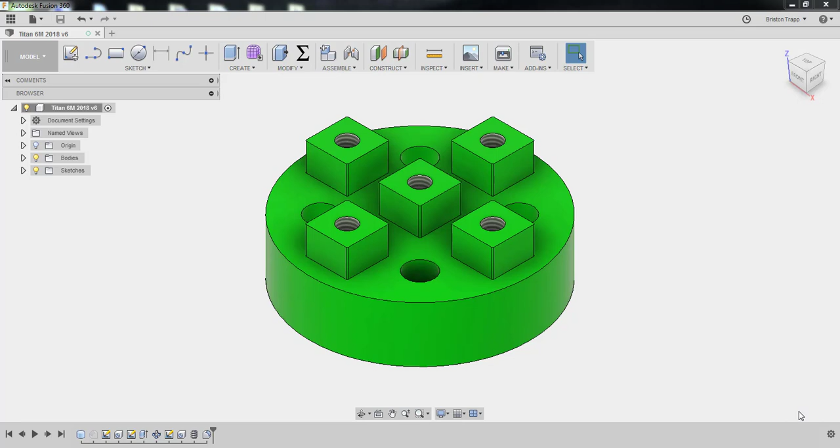Welcome to Titan Building Block 6M PCSC Machine Fab Edition. So, in your setup, it's going to be very similar to 5M. Our work coordinate system is going to be top, front, left corner of our stock.

Our stock's going to be fixed size box, X width 2.05. That is basically the minimum amount that we need to make this part. Any larger is going to be a little bit wasteful. 2.1 is probably a little more obtainable on the saw, but do your best to get 2.05, definitely no less than 2 inches, because that doesn't leave enough room to do any machining. Y depth is going to be 2, Z depth is 1, because we're using the same size stock.

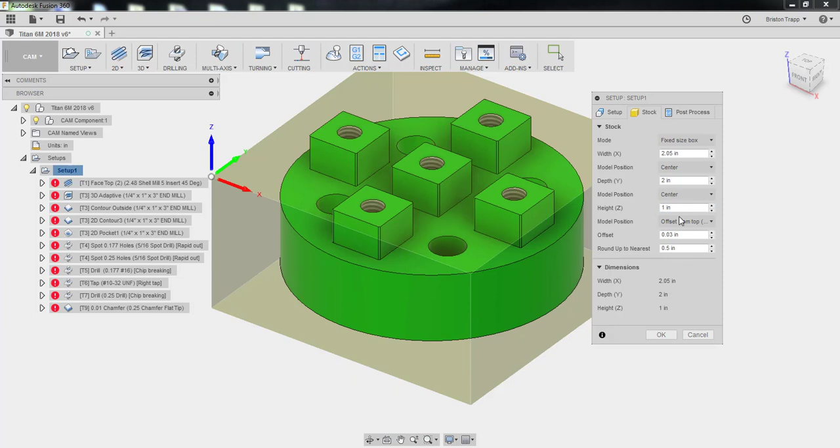And very important to make sure that you have it offset from top 30 thousandths, because we just want to take a little skim pass, and I'm only talking to the couple students that have buried the shell mill into the top of this part because they don't leave it offset, it's centered. We do not want this. We do not want our model centered in our stock in the Z direction because that is way too much of a cut. So, make sure it's offset from top, and 30 thousandths is just enough to take off, clean up the top surface of our part.

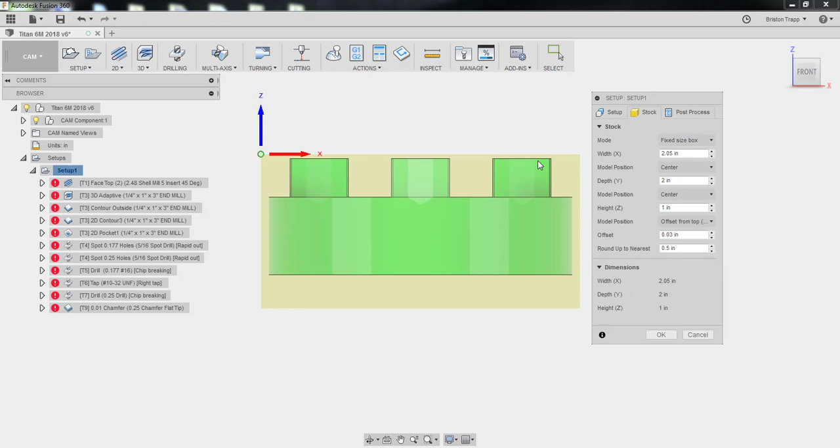Our stock size verify is going to be 2.05 by 2 by 1. Post-process is going to be preferably 6001. Program comment 6M S1 with your initials. Make sure you're still updating this comment section, because if you're just copying everything over, you might forget about this, and then what else are you possibly forgetting? And we're going to use our work offset number 1, G54, and this is basically the exact same work offset as Titan 5M, so we don't have to do any additional probing whatsoever.

So, in review, work coordinate system, top, front, left corner, stock size, pretty much the standard. Make sure it's offset from the top, especially if your initials are ZP. And that's it.

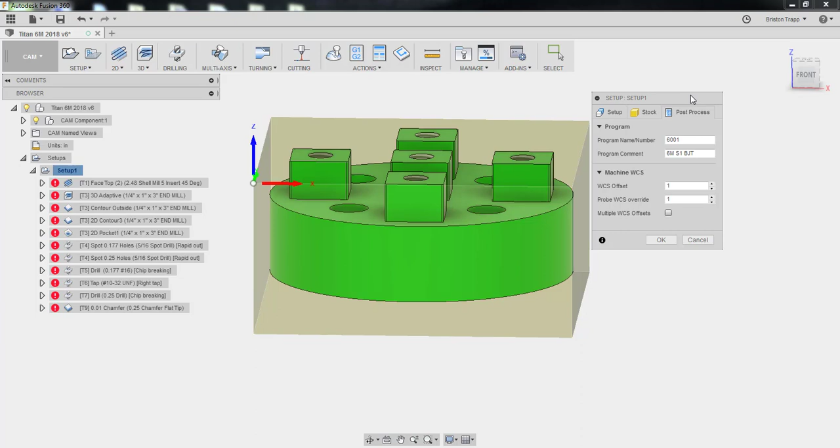The first operation, nothing new and fancy about this one. We've done it before. I'm not going to spend any time. If you're not sure about this, you're making me nervous. Go back and look at some previous videos.

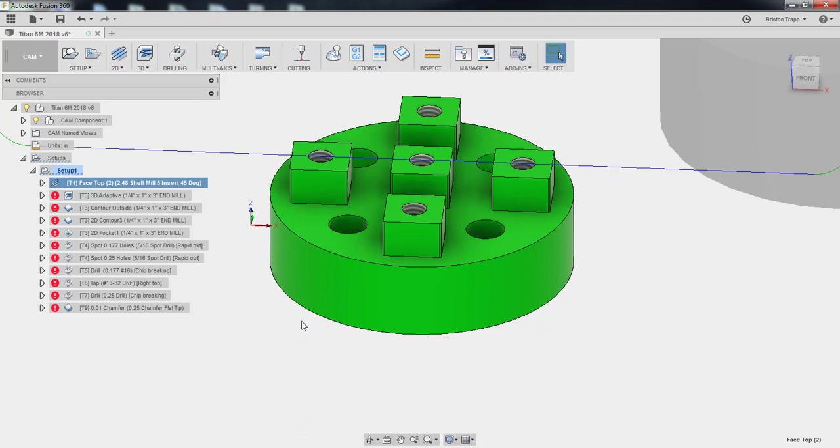We're going to simplify this a little bit. We're not going to use our 3/8 flat end mill because we're running low on them, and sometimes it takes a lot of time to change tools. We're just going to do all of the 3D adaptive work with a 1/4 inch flat end mill. We're going to have to take light cuts because we do not have the rigidity of the larger diameter tool. So you can copy the 3D adaptive from 5M and just change the tool and then tweak a few things.

So we're going to be using tool number 3, 1/4 inch flat end mill, flood coolant, 6,000 RPM. This is going to be going at 126 inches a minute. That will be 7 thou feed per tooth. Lead in 100, lead out 100, rapid plunge 20. And you're like, whoa, that's really fast for that small end mill. But I'll go over that on another tab. Just hold that thought. We're doing 3D adaptive, so we're going to have rest machining on, and obviously it's going to be from previous operations because we don't want to take care of the top of the part because the shell mill already did it.

Heights, pretty standard, same thing. We're shooting past the bottom of our model. If you don't know why, go back and watch some other videos. We just want to make sure we're going a little bit past our model. Give us some clearance. I don't know if it's clearance, whatever it is, just do it.

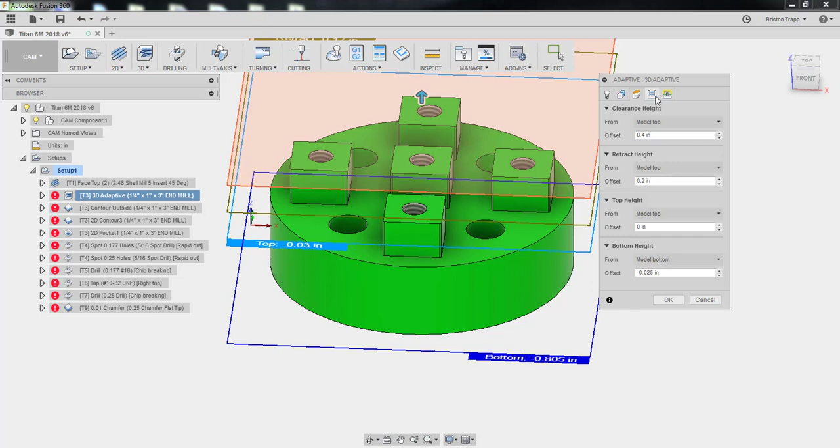And our passes tab. So our tolerance is going to be 4 thousandths. We don't need to be super accurate on our roughing operation. Optimal load is going to be 0.05. This is what's going to allow us to actually run our tool really fast because we're not taking a very wide cut as far as our optimal load width of cut. If I edit this expression, we're going to go 20% of our tool diameter instead of the default value of 30. So we're lowering our optimal load but still keeping our feed rate relatively fast. We're actually going faster than we would with a 3/8 tool, but we're definitely taking a much narrower width of cut. So 0.05 is the 20% times the tool diameter for the optimal load.

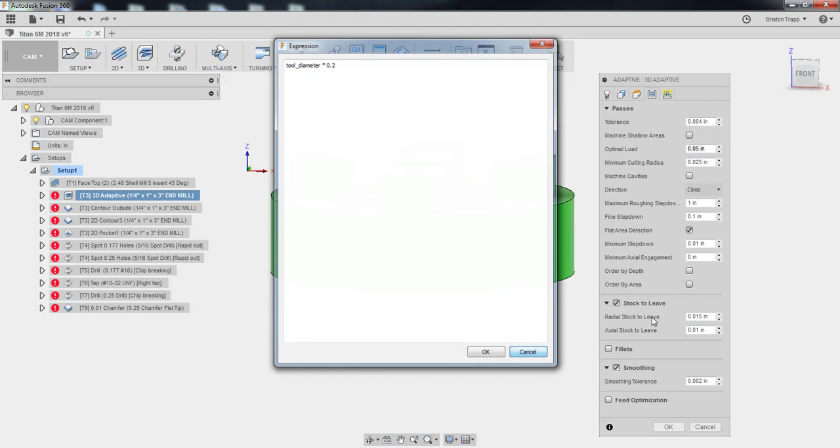Minimum cutting radius 0.025. Basically, that number will change how much our end mill can fit into this small space, so that is a default value 0.025. Don't worry about that, don't worry about climb. Maximum roughing step down 1 inch, that's our flute length. Fine step down 0.1. Minimum step down 10 thousandths.

Flat area detection, I don't even know if we need this on, but what the heck, we'll just check the box anyway. And we're going to leave stock because this is a roughing operation, not a finished one. So we're going to put 15 thou radial and 10 thou axial stock to leave. And we're going to put 2 thousandths of smoothing.

If you don't know what smoothing is, really doesn't matter. Just do it. Just makes our G-code nice and smooth. Allows the machine to move a little bit faster. It gets rid of unnecessary point-to-point G-code movement. So 2 thousandths of an inch for smoothing. And linking. Full retraction, preserve rapid movement. Most of this stuff will be fine as is.

Stay down level most. Non-engagement feed rate is going to be the same as our feed rate. So change that or right-click on it and reset it to the built-in default. We don't need to be having the machine going up to faster feed rates when it's not engaged. It's not moving very far, so there's not enough time for it to build up the speed to get there. So we're just going to leave it as default. And of course, we definitely don't need to go slower. So we're going to leave it at our feed rate.

Lead-ins, transitions, don't worry about that. We don't even really need to worry about any of this stuff because we're not really helical ramping into this part. We're entering from the outside. Click OK. And it's going to take some time to load.

This is a good time to evaluate your life. Think about your plans after high school. Remember, everybody can make a mistake while machining. It's not if, it is when.

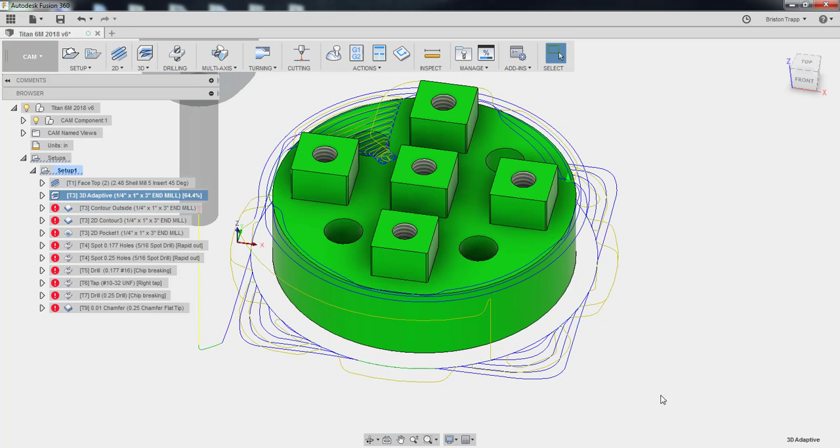So, now we got our 3D adaptive toolpath looking good. We got our toolpaths going around the outside for this whole part, and then we come in here, and this is where our minimum cutting radius goes. So that's good. It looks like we don't have any unnecessary extra linking moves. It all looks good. And then we're going to finish this operation. Tiny slow down. Slow is smooth and smooth is fast.

So we need to clean up the outside with a 2D contour, of course. And this is copied from a previous operation, but we're not using the 3/8 flat end mill. We're going to get it done with the 1/4 inch flat end mill. Tool number 3. 6,000 RPM going at 60 inches a minute. Rest of that doesn't really matter. Geometry is going to be there, of course. Heights, obviously, is pretty much the same. We're going to go down an extra 5 thousandths for the bottom height based off of the selected contour.

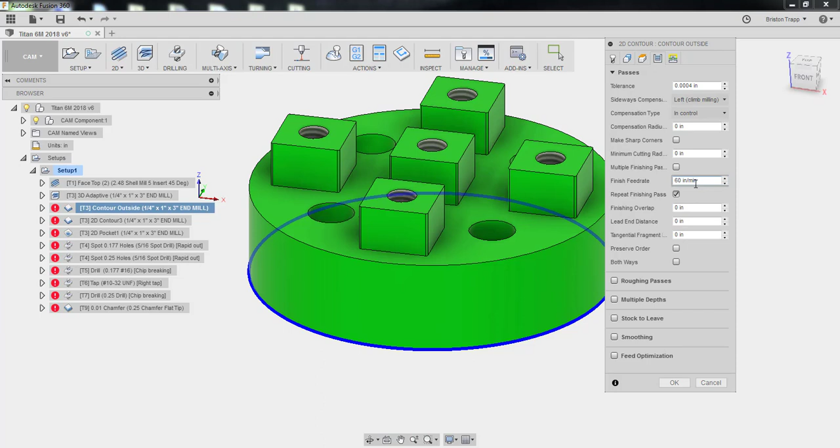Passes, 4 tenths, because we're going nice and accurate. Cutter compensation is going to be in control. Finish feed rate, 60 inches a minute. And we're going to repeat a finish pass, do a little spring pass, take care of any tool deflection that may or may not happen. And all this other stuff we don't need. Linking, most of this doesn't matter. We could change the sweep angle 45 degrees. It's pretty good. We're just going to leave all this stuff. Most of the time, it's not that important on this operation. Click OK. Right around the outside, but it's going to go around twice.

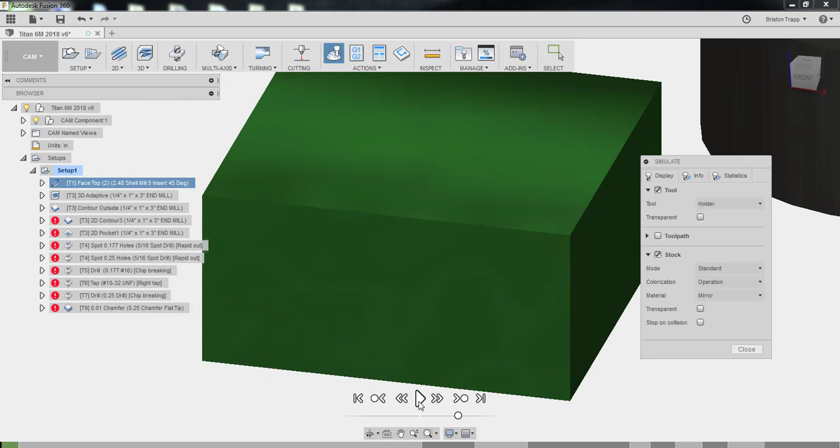And now we need to take care of this. Oh, I shouldn't have shown you that toolpath. Let's just watch the simulation. You don't have to wait till the very end to simulate. You can kind of just check as you go. There's our shell mill. We know what that looks like. And here's our 3D adaptive. It's going to go around and around and around. And then, oh, it's getting close. It's getting close. There's our finish pass.

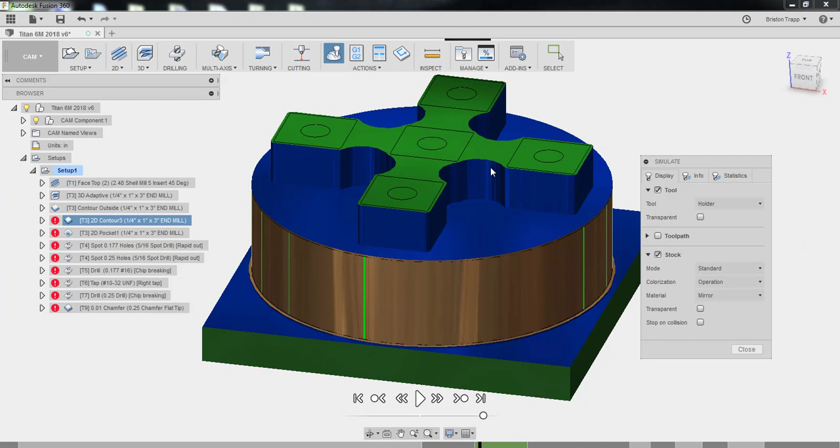But what about this? We could have the 3D adaptive go in here, but it's going to be such a small toolpath. There isn't a whole lot of room for our end mill to go in between these two pegs. And it just makes the machine shake, and this is not good for it. Let's learn a different way to do that. We could do a 2D contour around this and just plunge and go full width straight into this, but I'm pretty sure that's going to break that 1/4 inch end mill. Or we'd have to go really slow. We are going to take a 2D contour and ramp around it.

So 1/4 inch flat end mill, we definitely need flood coolant. Pretty much always going to use flood coolant, except for that first operation with facing, so you can actually see what the heck is going on. Because sometimes the flood coolant really messes up your visibility. 6,000 RPM, and the only thing that really matters on this is going to be our ramp feed rate, because we're going to be ramping in. So I just made everything 60, just to make it all the same.

Geometry is going to be this middle bottom peg, arrow on the outside. Heights, all this is fine. Passes, cutter comp is going to be in computer. We are not using cutter comp in control on this one, so in computer. Finish is still 60. Stock to leave. We're going to leave 10 thou axial and radial.

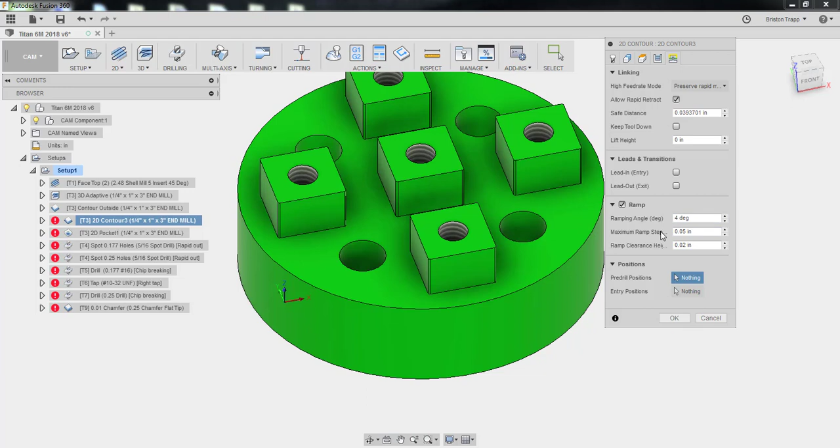And linking. This is where the magic happens. We want to make sure we click ramp. And it's going to be a 4-degree ramp. It's going to be a 50 thousandth maximum ramp step. I'm pretty sure it's step down. Ramp clearance height is going to be 0.02. Click OK. And that's going to allow our end mill to ramp around and around and around. Nice and smooth. It's not going to take a long time. It's not going to cause any, like, sudden load on our end mill.

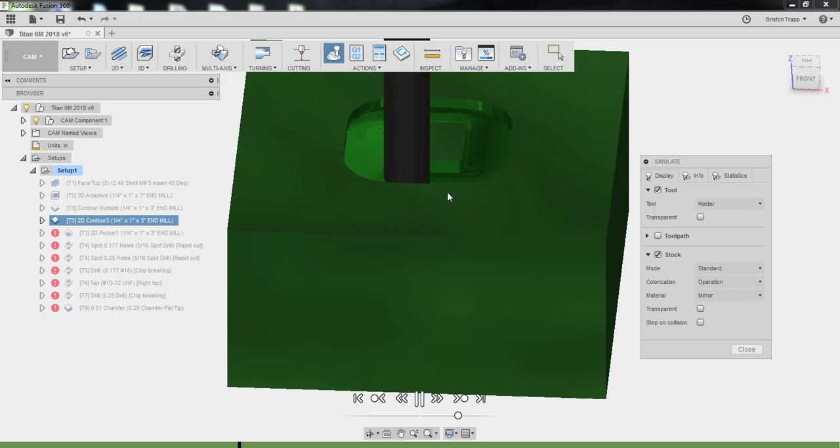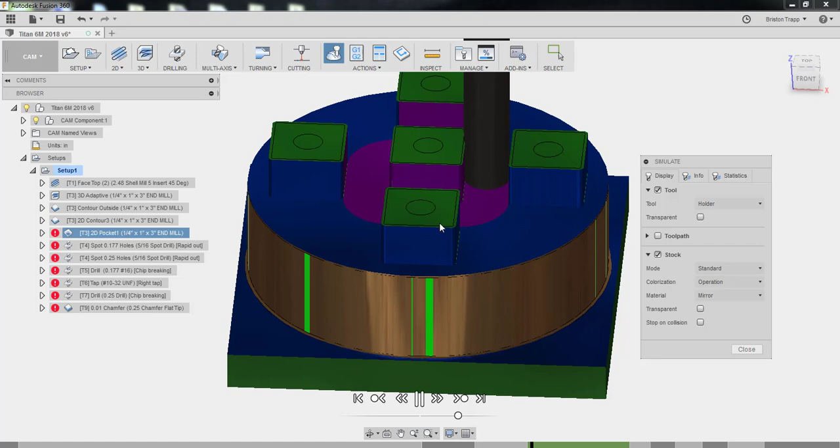So, we'll just go ahead and watch that simulation. It could technically maybe do this. Remember, you don't want to just simulate one thing. You either need to simulate everything, or sometimes turn the stock off so you can just look at the toolpath. Here we go. It's going to go like, because it's not cutting or anything right here, so it's going to sound different. So it's just going down a lot more gently than just plunging full width across, full steam ahead. And then there's that. Oh, and it's doing something else that I wasn't ready to show you.

So the next thing is to do a 2D pocket. Titan does a 2D contour. You can probably do it. I don't know. It really doesn't matter too much, I don't think. I'm not an expert. I'm not getting a lot of money to do this, so I think it's okay. It works for me, probably will work for you.

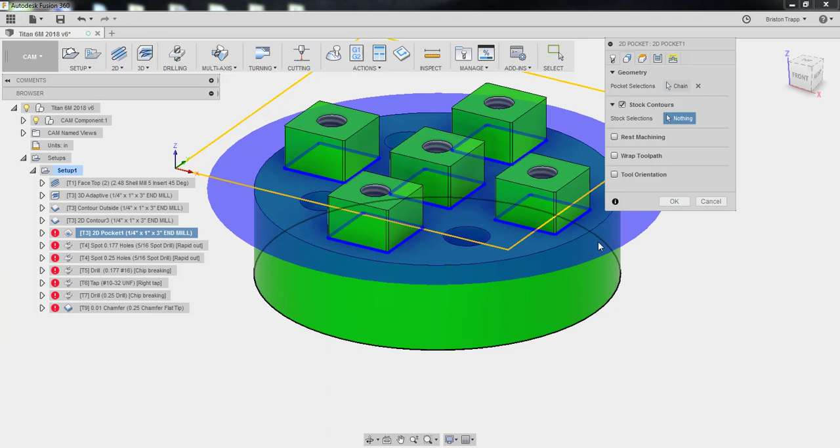So it's going to be a 2D pocket because we're going to clean up this floor, and it's also going to clean up the walls on our little pegs. We're still using the 1/4 inch flat end mill, of course. 6,000 RPM, 40 inches a minute. Nice and slow for a finish pass. I'm just going to get rid of this so you can actually see what I clicked on. So our geometry is going to be this surface. And then our stock contour is going to be that. Heights, all this should be the standard. We're not going any deeper. Passes, pretty sure all this is good. You can pause it, look at the numbers, but I'm moving on.

Linking, we got a bunch of stuff, but most of the time it really doesn't matter. We want to make sure that we're plunging. We don't need to do a helical ramp into like 10 thou material, so we can plunge straight down. And it should give us a finish pass that's going to clean up the floor and the wall. We could leave a little bit of radial stock and come back and do a 2D contour around each peg and use cutter comp, but it probably doesn't have to be that accurate. Maybe it'll still be within the 5 thou tolerance on the drawing. I think it's 5 thou. I don't have the drawings in front of me right now, I'm kind of just going from memory. So if you want to do a pocket and then a contour to finish the floor and then the walls, go for it.

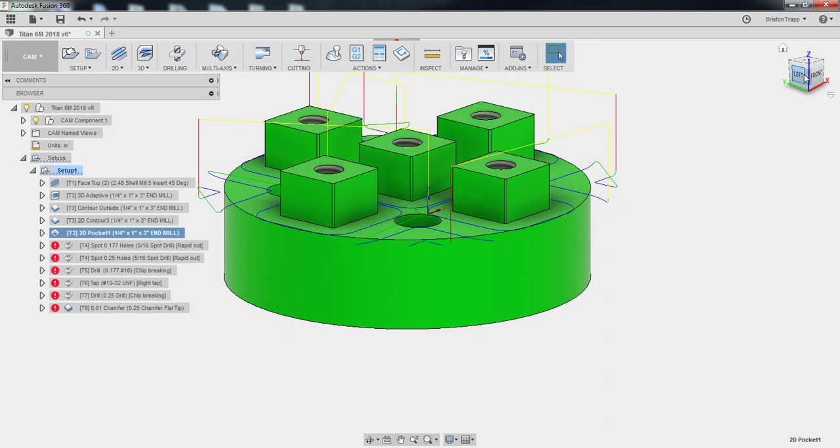And now we're going to move on to spot drilling. We're going to use the 5/16 inch spot drill because that's already loaded in the machine. We want to make sure that we chamfer this edge so we don't have any burrs, and we can't do that with our 1/4 inch spot drill because it's a 1/4 inch hole, therefore no room to actually chamfer. So we're going to use the 5/16 spot drill from one of the previous Titan building blocks that required the 1/4 thread. We can't spot drill them all at once because these holes are going to require different spot drill depths than these holes. So my first set of spot drills are going to be for the threaded holes.

I'm not going to spend a whole lot of time on this because I'm pretty sure you are experts in spot drilling by now. Select face. Make sure you got your 5/16 spot drill, plunging at 20 inches a minute, 5,000 RPM. Finish your faces. Height's going to be bottom height. It's going to be from the hole top minus 0.1. And our drilling rapid out. Just a little boop, boop, boop, boop.

And now we want to do the larger 1/4 inch holes. Same tool, of course, same feeds and speeds. We're just clicking on different faces, and we're going to go a little deeper, I believe. Going to go negative 0.125, an eighth of an inch, 125 thousandths.

And click on the next tab. Okay, spot drill right there. And now we need to drill our holes. First, we're going to drill the holes for the 10-32 thread. That's going to be a number 0.177 drill. That's drill number 16, not tool 16. The drill size 16. Remember, drill bit sizes come in letters, fractions, or numbers. So this is a number 16 drill for a form tap 10-32. It's going to form the threads, not cut the threads. Get those things from a drill chart off the interwebs.

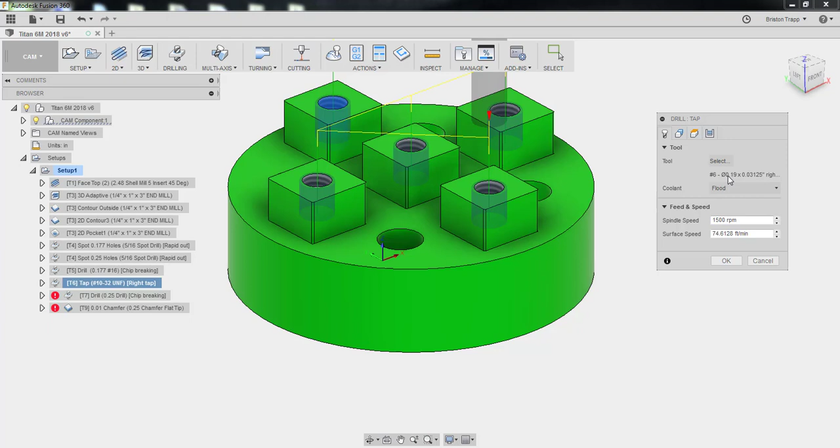10-32 tap. Make sure you copy your 10-32 tap, not a 1/4 tap, because that will result in a broken tap. Or a bad hole. I don't know. Don't try it. Select your right hand tap, the 0.19. That's the diameter, and this is like the threads per inch. Flood coolant, 1500 RPM. Geometry is the hole faces.

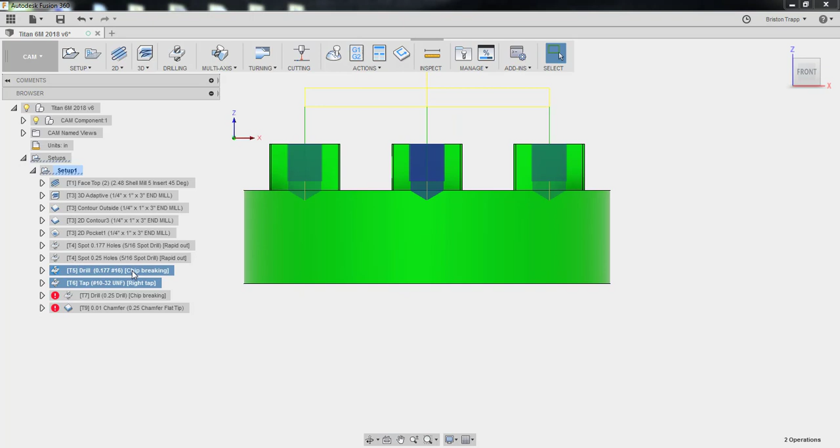And then the bottom height's going to be the hole top, negative 0.2, because I believe we need to have threads that are 0.150. So we're going to go down a little bit deeper because the bottom of the tap doesn't exactly cut really good threads. Cycle is going to be right tapping, and we want to make sure that our hole is going deeper than the tap. We need to make sure we got clearance so we don't break the tap. This is probably a little too much clearance, but hey, what the heck, not going to hurt anything.

Remember, we're just here to have fun, make some chips, maybe break some tools. Hopefully not crash a spindle into the table and rip the vise off the Haas. That would really be bad. And we're also going to be safe.

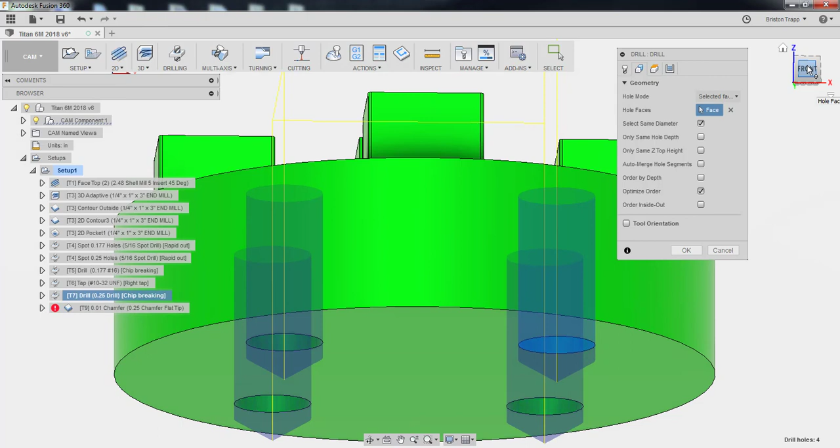Next operation is going to be drilling, and we're going to drill all the way through the bottom of the model, not necessarily all the way through the bottom of the stock. So we're going to use our 1/4 inch drill. You're most likely going to have to set this up. There are plenty of sample tools that you can pull from. It's basically going to look like this drill bit right here. Edit. Let's see. 0.25, 1/4 inch drill. Cutter. It's all here. It's all really fancy. You really don't need to do most of this. Most important thing is going to be diameter. And honestly, you really don't even need it because the Haas is just going to drill with the drill bit that's already loaded, and we don't have any crazy collision stuff to worry about. But if you want to set it up, it's just like that.

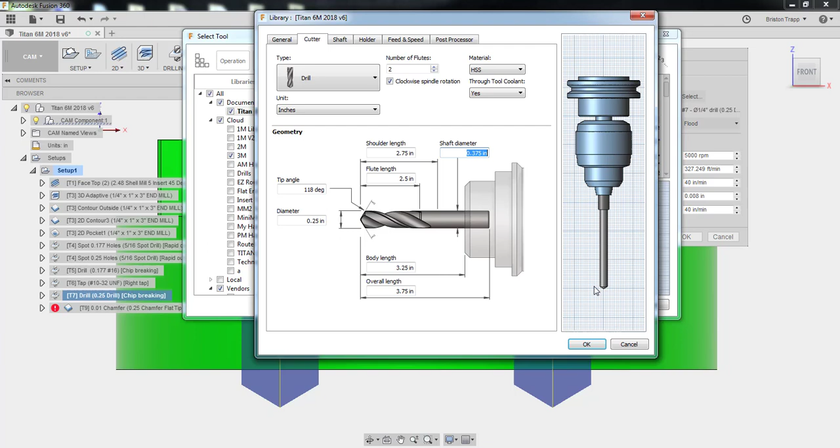Actually, this one actually sucks. This should not be... The drill bit shaft is usually the same size as the drill bit diameter, so 0.25. But I'm not going to save it since I change my feeds and speeds and stuff like that. It's fine. Shaft, no holder. Yeah, we got a drill chuck holder. Probably not even going to hold it in this chuck, so you probably don't even need it. Feeds and speeds, 5,000 RPM, 40 inches a minute. I do think that's pretty much correct. And I believe tool number 7, but remember, check the whiteboard for your tool numbers. I'm going to click cancel because I don't want to change anything. And we're going at 5,000 RPM, 40 inches a minute. Retract feed rate 40. We could retract a little bit faster, but it's not really saving us that much time.

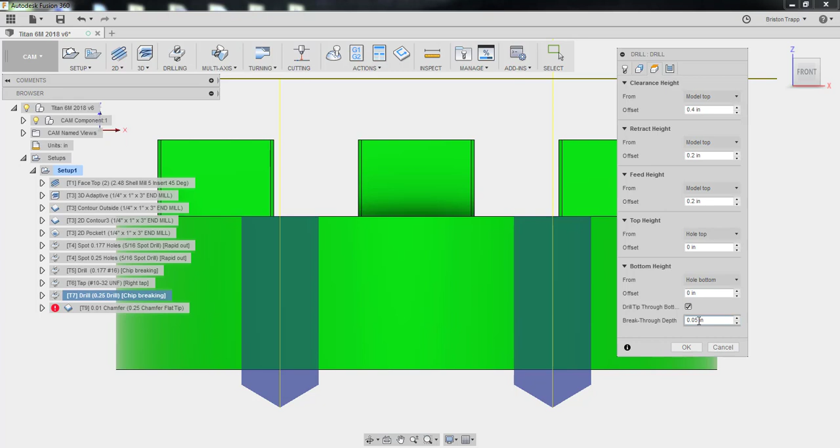Geometry is going to be our selected faces. And the heights. Bottom height, we're going to go hole bottom. Drill tip through bottom. And we're going to break through depth 0.05. This is basically how much that drill is going to shoot through the bottom of our hole and break through just the tip. So we want 0.05, plenty. We could also do stock bottom, and here's our bottom of our stock, and there's how deep it's going, but we really don't need to do that. That's just extra drilling. So we're gonna go hole bottom. Sometimes it's handy to drill all the way through the stock. This time, I don't think it's handy at all.

We're doing chip breaking, partial retract. We don't need to do full retract because we're not really drilling that deep, and we do have a somewhat, quote, large drill bit for what we use. We don't use a lot of big drill bits, so this one is kind of in our large category. All this stuff is probably fine with the default values. Click OK.

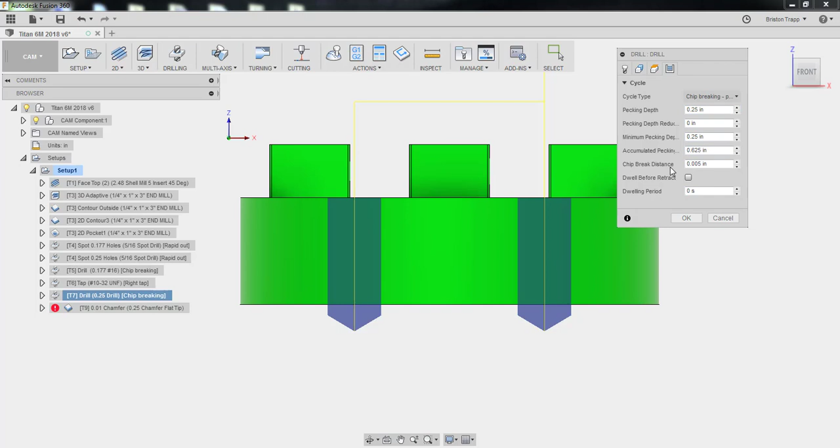And we're not tapping these. And we're going to finish with our tool number 9, 1/4 inch chamfer, 10 thou edge break. You know the drill. Copy it from before. 4,000 RPM, 50 inches a minute. Geometry, all those things. Make sure the arrow's on the right side. Heights, pretty much that's fine as is.

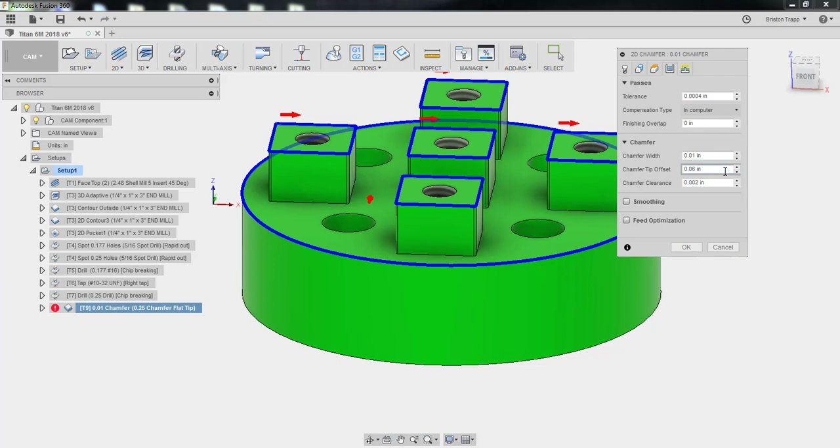Passes, chamfer width, 0.01. I did change the tip offset from 0.06 to 0.08 because we don't have to get into really tight areas on this part. It's going to be kind of tight when the chamfer's coming around right here, and we won't hit that. But by moving this number, it kind of positions our chamfer to cut at a different spot on the cutting edge so that one section is not getting worn out all the time. Even though we're milling in aluminum, it might not even matter, but it's just kind of good to really know what this tip offset actually does. Linking, all that stuff is fine.

Click OK. I probably should have told you to save your work like a bunch of times while you're doing this, but you should know better by now to always save your work, even though Fusion's great and autosave works, but our computers, especially the ones that have the blue screen of death issues, you know what I'm talking about. We need to make sure we save often.

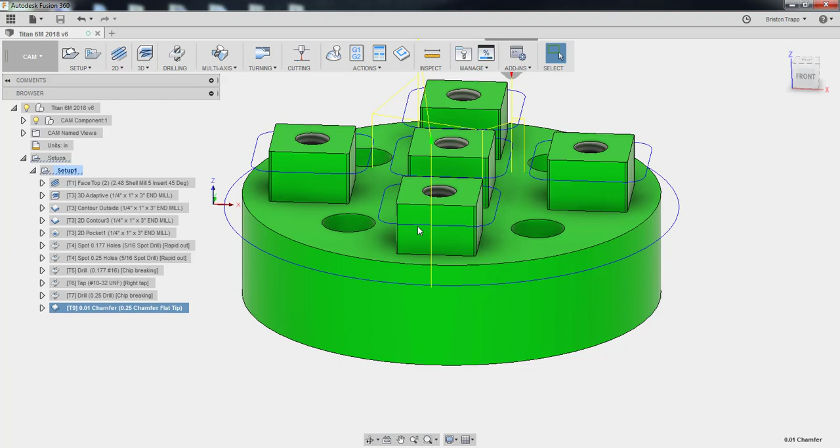So we got all our toolpaths. Gonna go ahead and turn off the visibility of my model. Gonna go to simulate, make sure I'm simulating everything. We got our stock, we got our work coordinate system, top left, front edge, simulate. This is all good. I'm gonna go toolpath, gonna change it to tail so it disappears. This is other stuff that you can do. This is good stuff on collision. That's always good to know if you collide into your part.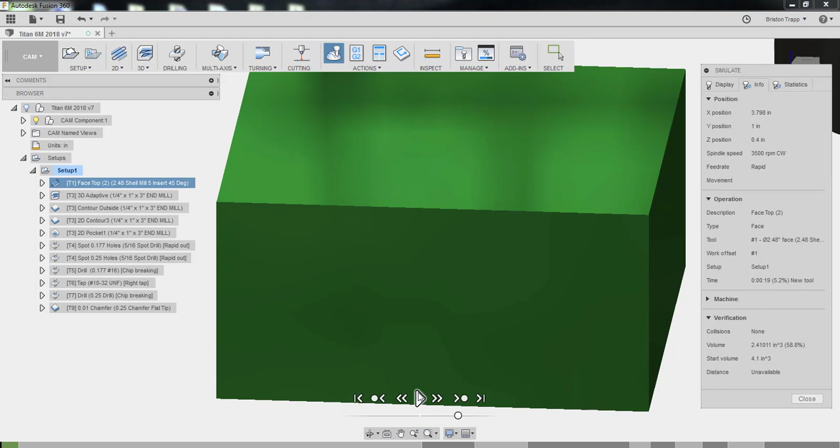Info, statistics. So, 7 tool changes, 11 operations, machining distance 271.648 inches, and an estimated machining time of 6 minutes, 8 seconds. I'm going to leave this on. Info. Play. I won't do that anymore, I promise.

Okay, there's our facing, then there's our adaptive, looking good. Got plenty of room on the bottom for our Talon workholding on the carrier that will be moved in setup 2. There's our 3D adaptive, making constant engagement, full depth, 1/4 inch flat endmill, doing work. We might break a tool, not gonna lie.

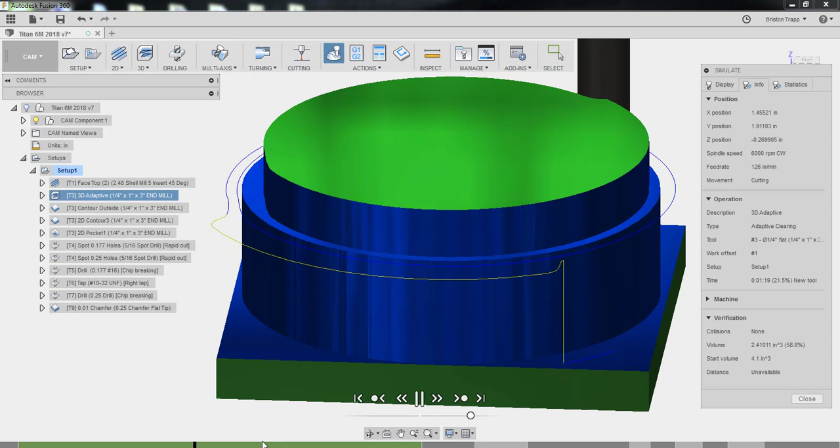We're using some dull tools donated from a machine shop. We got a bunch of them, and I did some test cuts, and it's making some significant chips. Might be able to go a little bit faster, but we'll see. We're definitely not babying it. Our mini mills gonna be running pretty fast. There's a finish pass, going around 2 times for that spring pass. There's our ramp, round and around.

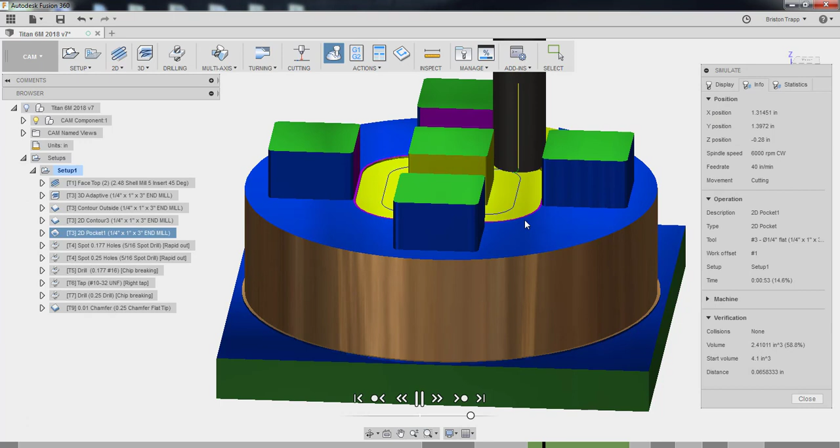Remember, you can always left click and scrub, whoops, easy, and go back and forth, kind of slow it down. It's not like you watch this as fast as you can. You want to stop and actually look and see what's going on. You can even drag through here. Slow it down where it's kind of important. You can go nice and slow. There's our spot drill. Sometimes if it's going really fast, you're gonna skip over stuff, and you might not even see it.

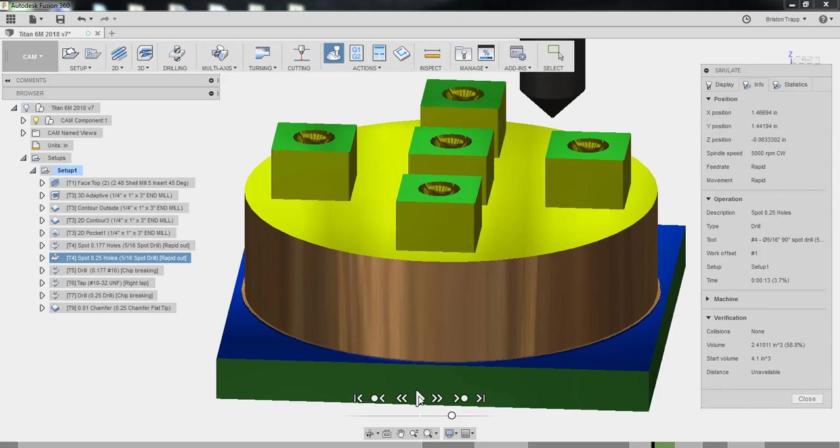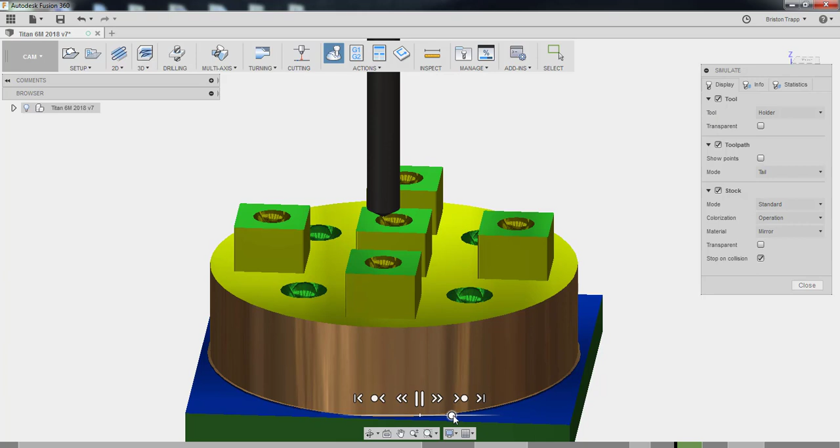Spot drill's looking good. If I turn my model back on, and display, transparent. I think that's lining up nicely with the chamfers. It looks good. There's spot drills. I hope you're not bored, because when you get bored, you get lazy, you get complacent, and you make mistakes. Check everything, trust, but verify. Slow is smooth, and smooth is fast. There's our drilling. Chamfer, chamfer, chamfer, chamfer. And that's it for setup 1.

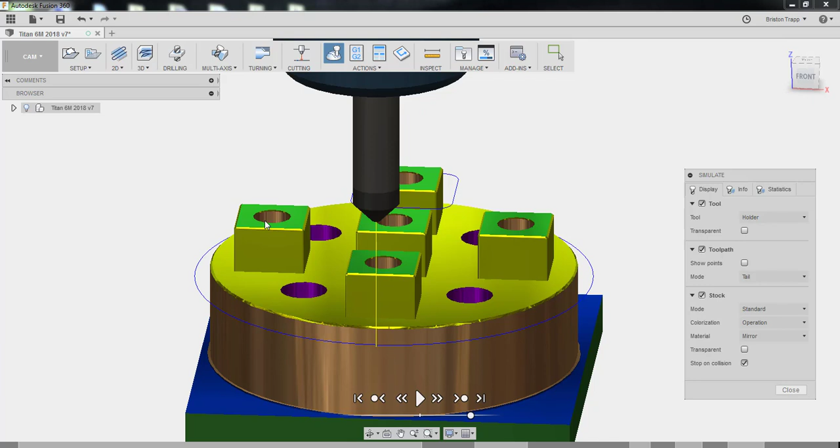And guess what? Setup 2 and 3 is the exact same as Titan 5M. Literally, you can just use the exact same G-code from 5M because it's the same size diameter. The height, I believe, is the same. You might want to double check with the drawing sheet, but I'm pretty sure we still have a top to bottom dimension of 3/4 of an inch. Let me hop back into the model and verify that the distance top to bottom, 3/4 of an inch. That's the same as the previous Titan building block we just did.

Back into CAM. Oh no, it's gone, disappeared. Turn your visibility back on. Oh no, there's nothing over here. It's under here. There it is. I'm gonna save.

And this is just gonna be a little kind of a, I think they call it, Easter egg. Easter is right around the corner. But just to see if you're actually watching this video all the way to the very end and you're still paying attention because you're a student that values your education, I'm gonna show you some new things.

In your setup folder drop down, we're gonna add some manual NC. We're gonna do a comment. Our comment is going to be WCS top front left. Click OK, and I'm going to drag this up to the very top. Don't worry about this, we have to regen because we're adding stuff even though we're not really changing the G-code. These are just comments. I'm going to add another comment. 35 foot-pounds for the torque wrenches on the Mitee-Bite Talon grips.

I'm going to take this, I can also just duplicate it, add it right there, edit. Oh, what else should we do? 25% rapid for first cut. You can bump up the rapids a little bit after your first cut. Remember, it's your first cut. That's the moment of truth as far as the correct work offset, your tool lengths. Feed rate's going to be 100%. We're up against the talon grips and the stop.

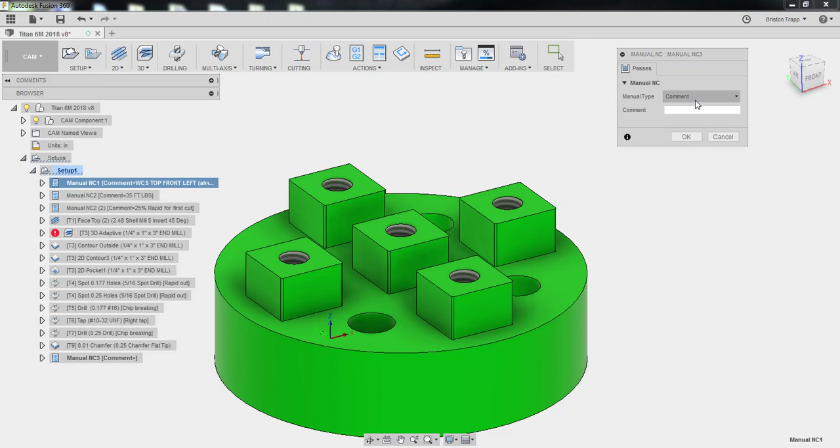I'm going to go back into this one. Front, top, left. Remember, our G54 is already set. What other manual comments do we have? Stop, we can do optional stop, dwell, tool break control, tool measure, chip transport, open close, we can't do most of that, verify clean, action, print message, display message, alarm, alert, pass-through, force, tool change. So, we're good with those.

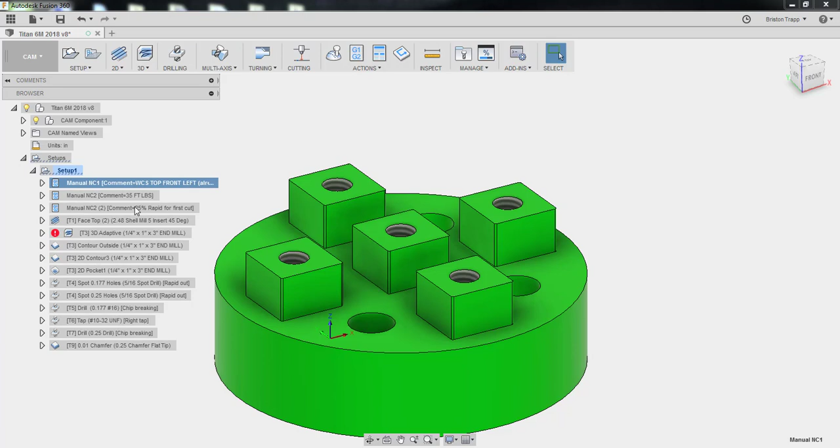Cancel, so our comments are work coordinate system, top left, 35 foot-pounds, which will remind you to tighten it down with the torque wrench. 25% rapid for the first cut, and then we got our facing. I need to regenerate that. Remember, it's looking at previous operations because it's doing rest machining.

Another comment could be single block. Single block isn't going to hurt anybody, especially that first cutting operation. Make sure we're going nice and correct with our work offset, our tool numbers, and stuff like that. So if you're that student that needs single block, go ahead and put a little reminder in here for you to turn it on. And then post-process, remember, we just want to post-process the entire thing.

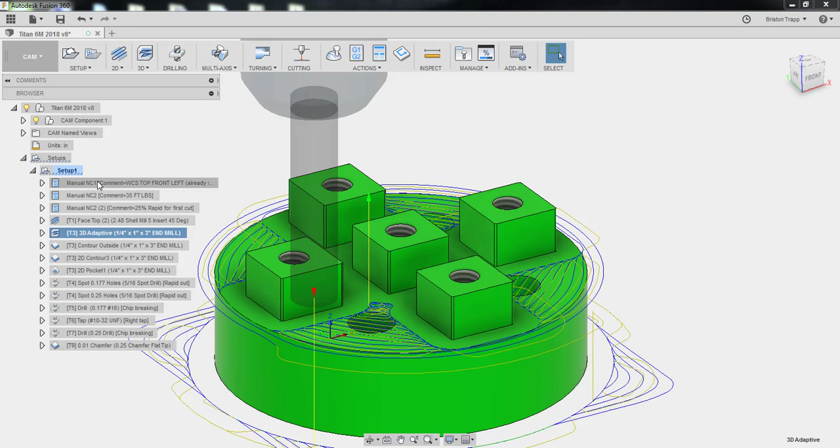I wish I had $100 for every student that would just post-process the last thing they worked on. They got to the machine, they're like, I'm ready to go, and then basically everything's missing except for the last operation, because it's the last thing they did.

You want to make sure that you have the entire setup done and ready to post-process. G1, G2, our post-processor, next-gen control for the super mini-mill, not the regular mini-mill. You could get by with the pre-NGC on both of them. Program name or number is going to be 6001. Program comment, all the same. Most of this stuff is good. G187 is on at yes. And post.

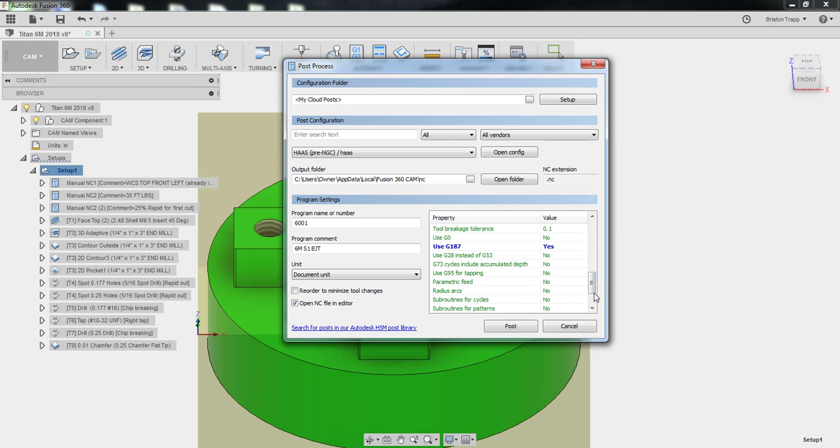Desktop. Remember to save your work before you post. Hopefully it's not too late. Some of the laptops have been crashing at that unfortunate time. I'm going to save this on my desktop.

And you need to look at your G code. This is where the machine reads all this stuff, and then it figures out how to move with the tools and do all the CNC stuff with the general and miscellaneous codes. Don't just post this and close this as fast as you can. This is basically what the robot needs to make your part. It is very important that you look at your G code.

Tool 1, face mill. Tool 3, flat end mill. There should be no tool 2. We are not using the 3/8 flat end mill. Tool 4 is going to be our 5/16 spot drill. Phil, where's 5/16? Oh, it's a decimal. But don't worry, you're smart and know the value and importance and how to convert fractions to decimals.

Tool 5 should be our .177 drill. Tool 6, our 10-32, the right-hand tap. Tool 7 should be the quarter-inch drill. And Tool 9, our quarter-inch chamfer. Remember, all tool numbers are subject to change, and please check the whiteboard.

Here's our manual comments that we added. Work coordinate system, top, front, left, already set. 35 foot-pounds, 25% rapid. And then we got our facing operation right here. 3500 RPM, G54. Here's that G187, which isn't even used during the facing, but it's there. And then we got our G code and all this stuff right here.

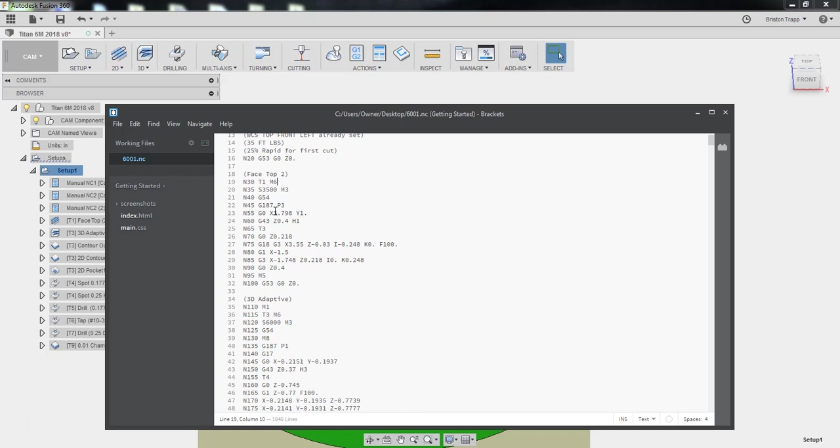And then we got our 3D adaptive, 6000 RPM. G54, it's going to use tool 3. And then there's all our code. We got a lot of it. And then we got a 2D contour and a pocket with not as much code compared to the 3D adaptive.

Spot .177. Then we got our other spot drill because we're spot drilling the quarter-inch holes. And then we got the drill and the tap and probably some chamfering. And we're looking at 1,846 lines of code.